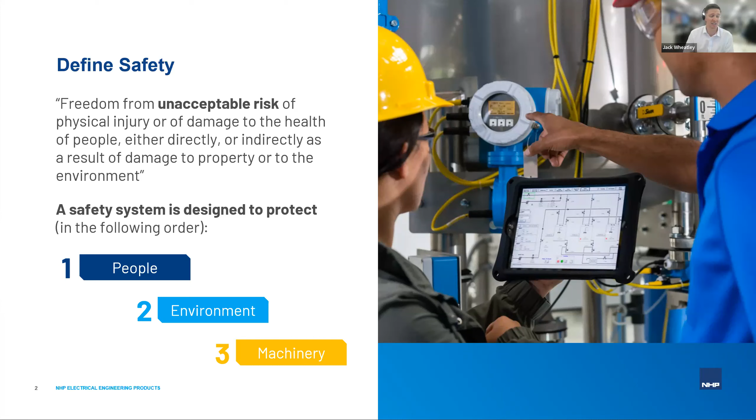Cool. So let's have a dig into the concept of functional safety a bit. So functional safety refers to having a dedicated control system, which is in place to oversee and manage the potential hazards that might be present in a machine or its processes. And the main goal of functional safety is to continuously monitor and then regulate those conditions that could pose an inherent risk in any of those machine processes. And if left unchecked, any of these conditions could lead to a dangerous situation.

Yeah. To add to that, functional safety systems encompass various aspects: basic checks like verifying your guard status, to more intricate tasks, such as controlling a robot arm, its speed and position. These different facets ensure the machine's operated safely. So by implementing a functional safety system, effectively, we're mitigating the risks to prevent a hazardous situation for people. This involves integrating monitoring and control mechanisms, so people are working with the machine together, and ensuring that we have a safe operation.

Yeah, so functional safety revolves around using specific control systems which are dedicated to protecting the machine and the people involved. So it does play a critical role in the overall safety when it comes to machinery and the processes. Yeah. So moving forward, we're going to explore how those functional safety systems are implemented, and the various components involved, just to ensure that your operation is secure and safe with that machine.

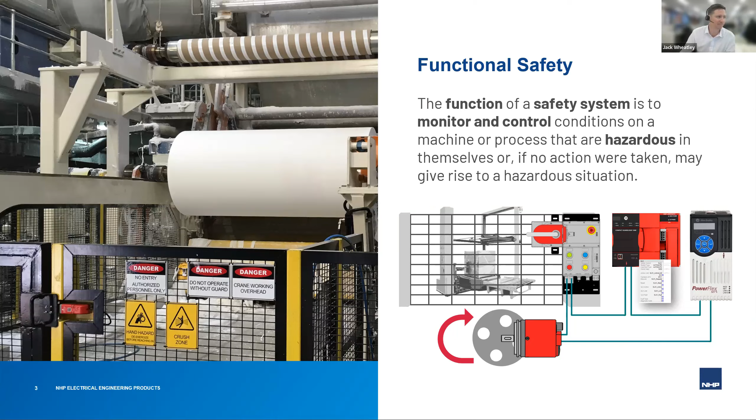That's very good. So over the years, you can see that there has been a significant evolution in safety control systems, and that's been driven by various different factors and considerations. When we look back on the history of machinery safety, you can see that there's a significant shift in focus. Yeah, I really like this picture. So back in the early days, as you can see, productivity took precedence, with safety measures being an absolute minimal consideration.

So machinery was operated without adequate safeguards, which exposed operators and nearby people to numerous hazards. Concepts like hazard analysis and risk assessments were virtually non-existent. So essentially, it was a bit of a fend for yourself approach, with little emphasis on a substantial safeguard or any safety measure for that matter. So of course, unfortunately, this led to higher risk of injuries and accidents. Fewer safeguards were implemented, as they were seen as hindering productivity.

Yeah, that's right. You can almost picture a 19th century workhouse with kids with little arms being able to stick their hands into tiny crevices of the machine. Not exactly safe practices. But of course, as time went on, there was a growing awareness among people about the significance of ensuring safety of themselves and their workers.

And this led to more societal pressures to introduce regulations that emphasize the importance of providing a safe work environment. This shift in the mindset raised the importance of safety and brought about more of the concepts of risk assessments and risk reduction strategies. And as a result, safeguarding measures were eventually introduced to prevent individuals from being exposed to hazards, even if it did mean temporarily halting the machine for adjustments or for modifications.

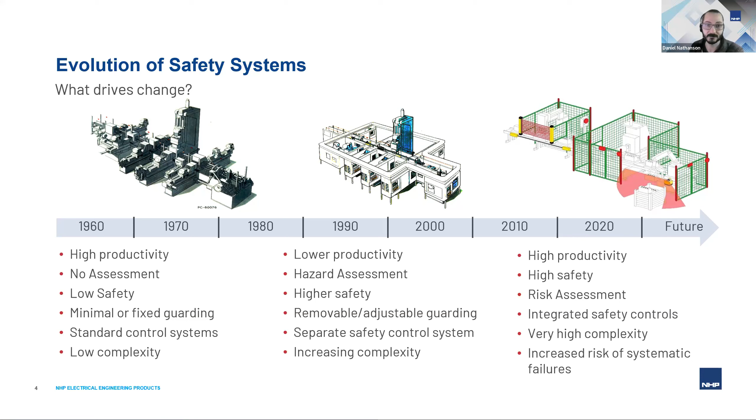But when it comes to tackling the challenge of devising a machine safety system, we can actually rely on a systematic approach that helps guide us through this entire process. Designing a safety system may seem a bit daunting, but adhering to this safety life cycle ensures that we don't overlook any critical steps along the way. It is an ongoing endeavor to uphold safety throughout the machine's lifespan.

Once we have a clear understanding of what the risks and functional requirements are, we can advance to the design and verification phase. During this phase, we formulate a safety system and conduct thorough verification processes, just to ensure that it aligns with the specified requirements of that machine. Following from the design and verification stage, we can start on the installation and the validation. This involves implementing and installing the safety system, but then also validating and testing its performance to make sure it does what it's supposed to do in the actual operating environment, not a bench test.

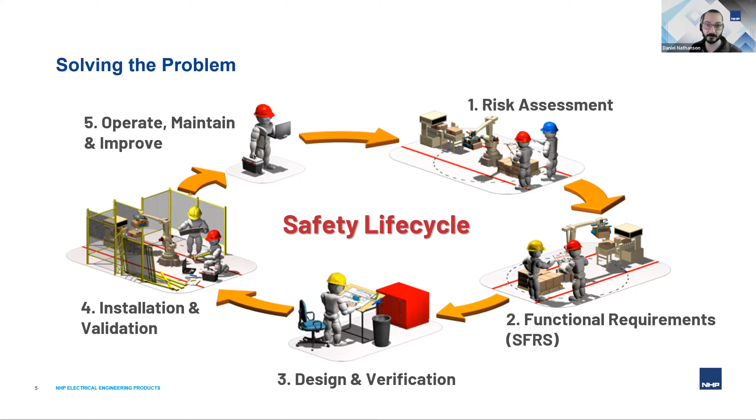Yeah, the key word there being systematic. So going through the steps, going through the motions, and making sure that everything gets checked off as you go along. Okay, so some safety standards.

Luckily we have got some standards at our disposal to help guide us in designing safety systems. However, it is worth noting that there are several standards that we use in Australia and around the world. The selection of a particular standard depends on things like your familiarity, the design complexity, and the intended deployment of the machine. While personal preference may vary, all three of these standards are still recognized and perfectly valid choices for machine safety applications in Australia.

Yeah, that's right. In fact, probably still the most commonly used standard in Australia is AS/NZS 4024.1501. This is based on the original European standard, EN 954-1. That standard focuses on qualitative safety performance. It classifies the design and the behavior of safety-related components in a control system into different categories.

However, it is important to note it doesn't consider the fault probabilities or the time intervals between these faults. Yeah, it has got some limitations, and I love that word qualitative. It's a bit of a mouthful.

But on the other hand, we've also got AS 4024 Part 1503, which is a bit of a newer one. It is based on the 2006 version of the international standard, ISO 13849 Part 1. And this standard takes more of a quantitative approach to safety performance, because it also evaluates factors like architecture, the probability of failure, and the diagnostic capabilities of the system.

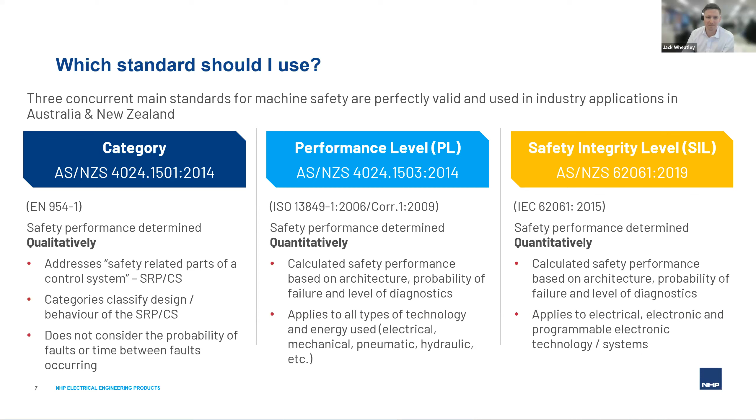Yeah, so there are some differences beyond the names. In Part 1501, we use a range of categories from Category B to Category 4, B being our least effective in risk reduction versus 4 being our most effective. Category B isn't commonly utilized, as it generally involves using standard components with not much fault tolerance. They're not specifically designed for safety applications, but they're used with the basic safety principles in mind.

On the other hand, Category 4 leverages higher levels of fault detection and fault tolerance through redundant components. So this makes it the most effective in mitigating those risks. Yeah, Category B, I like to think B is basic. There's no safety equipment. It's just some basic safety principles.

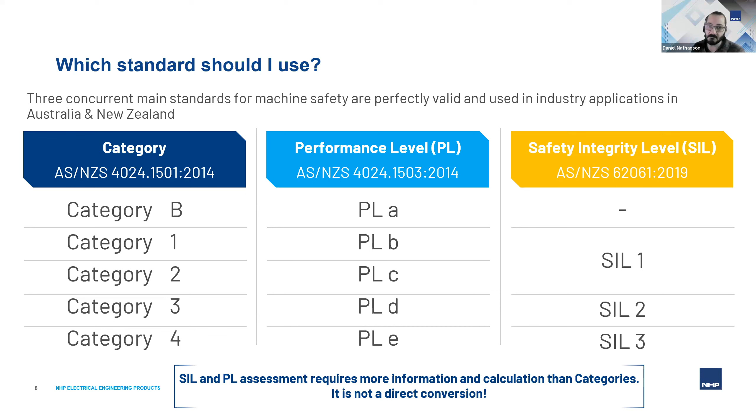And so, if you've ever had to actually look at the safety standards, which I hope some of you have at least at this point, either the international or the local standards, you will notice that there are quite a few to pick from. It's not just necessarily the 3 that we showed in the previous slides. Those 3 that we showed earlier were more around the design of the control system. But that's only one of the steps in the safety life cycle.

There are standards written to help us with performing the hazard identification. There's standards for the risk assessment. There's standards for the safeguards and for the different products that we use in them. And there's also standards which are specific to different types of machinery. And these standards are organized in a hierarchy, both at the international level and in the Australian standards. Yeah, so you can see in the slides how similar they are, but there are a few differences. So in both systems, there are 3 main levels in our triangle.

So on the international side, Type A standards cover your fundamental concepts and design principles, and that applies to all machinery. Versus Type B, the standards are more generic and can be applied to a wide range of machinery. Even within Type B, it's been split into B1, which focuses on specific safety aspects, versus B2, which addresses safeguards. So if we look lastly at our Type C standards down the bottom of the triangle, these have got detailed requirements for specific machines or a group of machines.

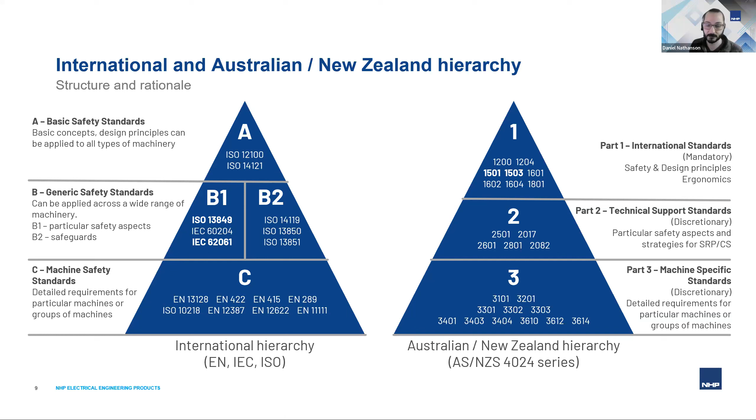Yeah, that's right. There's no point in buying the standards that you don't need, whereas the Part 1, well, you do need all of them, so you may as well get them in one hit. Yeah. So let's have a bit of a closer look at the Part 1 series now. And there are actually quite a few standards in Part 1. It's a pretty thick document, which we are going to cover in a bit of detail over the next few slides. So this slide here has got the first 5 standards, which cover things like a lot of the general principles, risk assessments, and ergonomics.

Yeah. So there are quite a few, as you can see. So these are mandatory standards in AS 4024, so they're worth looking into in a bit of detail. So I'm going to start with 1201. This draws from the ISO standard 12100, and that serves as the foundation for any machine safety system. Its focus is generally on risk assessment and then risk reduction, which provides fundamental principles and terminologies. So this standard lays the groundwork for identifying hazards, evaluating the risks, and devising the risk control strategies. Yeah, it's pretty much the most fundamental standard that you can get.

Part 1204, this one's based on the IEC version 60204-1, and this one addresses the electrical equipment of the machine. So, AS3000 deals with everything up to the isolator, and then Part 1204 deals with everything from the isolator to the actual machine itself. So this talks about a lot of the general requirements and recommendations around electrical safety of the equipment. And it also gives guidance around ensuring that you've got consistent control schemes, consistent operation and feedback, the user friendliness, and how easy the machine is to maintain and operate, really.

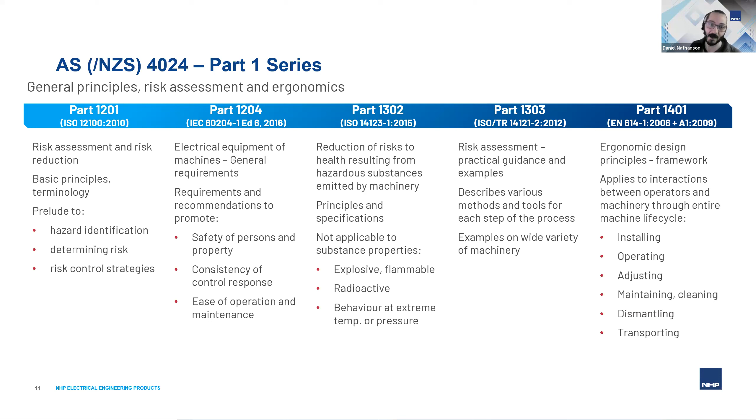There is another part that we didn't show on this slide, which is Part 1100. That one is actually the application guide to the Part 1 standards, and that standard is basically all of this presentation lumped into a standard. So it encompasses everything that we're talking about here in the application and the relevance of the Part 1 standards.

So let's take a closer look at the Part 1, Jack. Yeah, let's have a look. So let's look at AS/NZS 4024 Part 1. And this specifically focuses on designing safety-related parts of your control system. So they can be often abbreviated as an SRP/CS. Yeah, SRP/CS is a term that's used a lot. We might just call it safety control systems, probably the easier way to do it, just for brevity.

Yeah, this is actually where the real juicy stuff in the 4024 series really starts. My personal opinion, of course. In Part 1501, that's one of the ones that we saw in the earlier slides, which was the safety category standard. So it's based off the EN 954 standard, which was also the 1999 version of ISO 13849 Part 1. So yeah, look, this one is a little bit older, but we did keep it in the Part 1 series after being reconfirmed in 2014. That's 9 years ago now.

And there is a long transition period that they're accounting for, which allows us to still use categories, because machine safety is still one of those things that's becoming more and more well understood, and categories is one of those easy to digest concepts. Eventually we will make the transition from categories by themselves, but in the meantime, it's still a well-tried method for machine safety design. So it's going to stick around for a little bit longer. I'm hoping sooner rather than later. So I think we'll be waiting for a while.

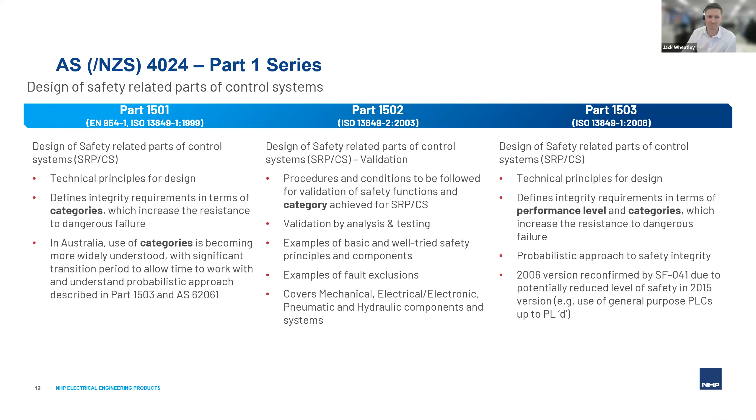Yeah. All right. So let's continue into the Part 1 series. Part 1600 are the equivalents to the Type B2 standards. So they specifically cover requirements for safety components and subsystems, specifically focused on interlocks and guarding design. Yep, this is another one of my personal favorite sections of the standard. There's a few, Dan. Yeah, you can tell I've got a bit of a passion for this.

Yeah, so these ones are all about the essential components of most machine safety applications. So we're talking about things like the guarding, the monitoring of the guarding, interlocking, and of course emergency stop, because every machine needs an e-stop on it. And starting with Part 1601, this one's based on the European EN 953, and that covers things like the design requirements for fixed and movable guarding, which is used to keep people out and hazards in.

Yeah. So I guess the whole point of guarding is to minimize the exposure to a non-mechanical hazard. However, the standard doesn't cover guards that activate interlocking devices. So this is why we also have Part 1602; it's based on the 2013 edition of ISO 14119. So this one concentrates on the interlocking devices associated with those guards. So it gives details to their design and the selection, operating principles, and also the different forms of interlocking devices

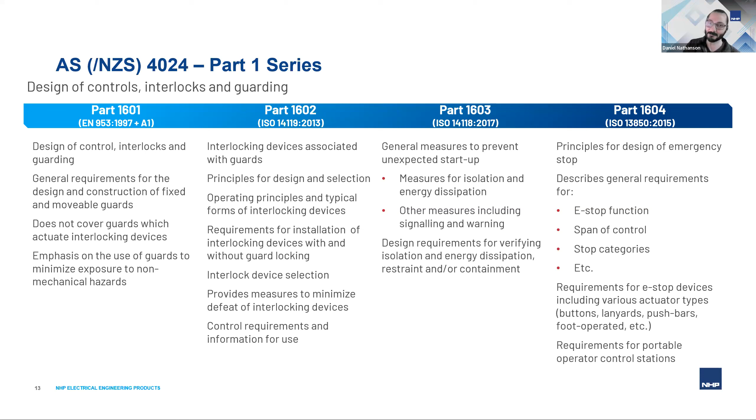Yeah, if there's one standard I want everyone to read, can you please read this one on emergency stops? Because I've seen a lot that don't follow this type of standard and are a little bit subpar. This is another one of those really good ones that give you details like what color the e-stop needs to be, because I've seen black and green e-stops before. That sort of stuff shouldn't fly, but it is covered in this standard.

All right. So last few standards in our Part 1 series. So we have those that focus on the human factor aspect of any machine operation and interaction. Yep, that's right. I did mention that machines are used by people, so they need to be made with people in mind. So Parts 1701 to 1704. These provide a standardized list of human body measurements. And these measurements are essential when you're designing a lot of the safeguarding measures. So things like specifying the gap sizes, access points, just ensuring that machine areas are safe for human interaction.

Yeah. I guess additionally, Parts 1801 and 1803 outline our safety distances and gaps. So this standard comes into play when we're trying to determine appropriate placement of our guards. So they're considering factors such as opening sizes, approach speeds, and of course, the stopping performance of a machine. So it's crucial to ensure that there is enough distance between the human and the machine to allow for that safe operation to respond in time.

Yeah, these are some of the more important ones to consider, and we use these a lot when we're positioning a lot of the non-guarding components like light curtains, laser scanners, pressure mats, and there are other standards which we'll get to in a moment which address those.

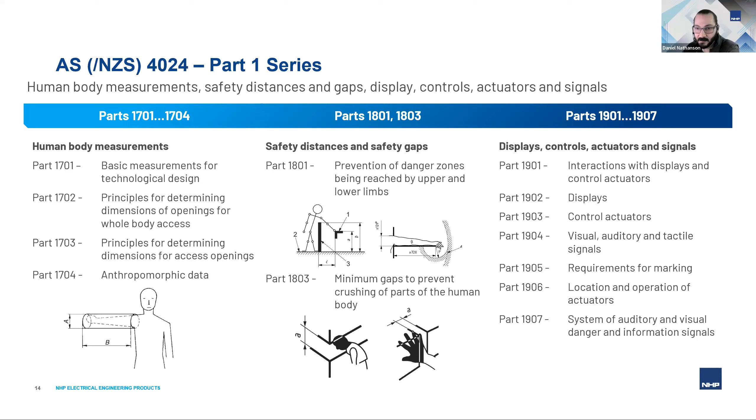And lastly, we've got Parts 1901 through 1907, and these ones focus on the requirements for displays, controls, actuators, signaling. These standards provide a bit more guidance on how users and operators can effectively interact with the machine, in terms of controlling its functions, changing settings, and just receiving feedback on its current state. Mm-hmm.

Okay, more Part 2 standards now, getting into the thick of it. Love it. Let's dive into what is the AS/NZS 4024 Part 2 series. So this focuses on specific safety aspects and strategies for safety-related parts in a control system. It's important to understand and implement these standards based on control strategies employed in the machines. Absolutely. So some of these are more applicable than others. It depends on what kind of control strategies you employ in the machine.

So, for example, Part 2501, which is based on ISO 14159, looks at things like hygiene requirements. It becomes relevant in situations where there's maybe a hygiene risk to the consumers of the product.

And so these are particularly used in machines that are used in pharmaceuticals or in food and beverage. Yeah, so let's now look at and move over to part 2601. And this covers two-hand control devices. So although they're not commonly used nowadays, due to the available advances in technology with light curtain systems, this particular guide provides guidance on the design requirements if people do choose to employ that control strategy. Yeah, we don't see too many new machines coming out with two-hand control these days, but the standard is there in case you do want to implement it.

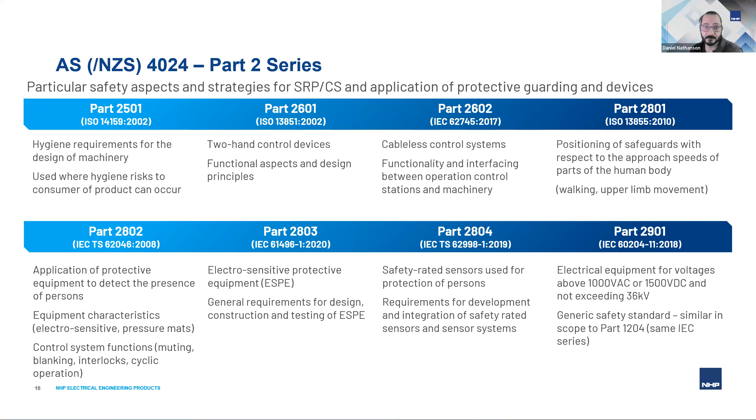Cool. Well, let's shift our attention to the part 3 series now, Dan. So this is a whole suite of standards specific to various types of machinery, right? Absolutely. And there are currently, at least at the time when we wrote this presentation, 25 standards in the part 3 series, and each one of these is tailored to address very specific hazards or risks or safeguarding requirements associated with particular types of machines. Part 3 is actually going through a lot of work at the moment. There's a lot of new standards being adopted into this series, and so we do expect to see a lot more of these in the future.

Yeah. A good thing to note also is that, while you might see these standards primarily used by our original equipment manufacturers, our OEMs, who are typically involved in the design and the construction of machines, they also serve as a valuable reference for ongoing operation, your maintenance and your safety improvements for any type of existing machine. Yeah, that's right.

So the Part 3 series covers a wide range of different machine types, as we mentioned. So things like presses, milling machines, plastic and rubber injection molding, robots, robotic devices, they are coming. Packaging machines like palletizers and wrappers, conveyor systems, forestry machinery like wood chippers, compacting machines like balers.

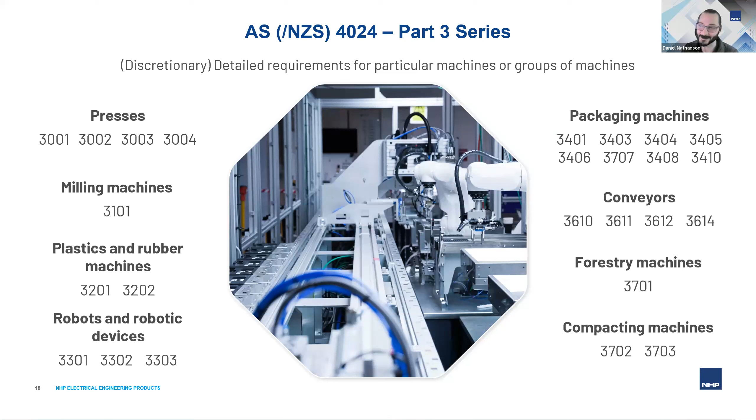All right, so let's now explore what the latest updates are for the AS/NZS 4024 series, particularly since the 2014 edition. These updates reflect the ongoing efforts of the Australian Committee we mentioned for machinery safety standards, and how they incorporate these new standards into the 4024 series. That's 4024, yeah. So currently we're looking at the 2019 version of Part 1, and there have been some significant additions in both Part 2 and Part 3 since the previous editions. Yeah, so I'll start with Part 1. You can see the highlighted standards introduced since the 2014 edition, and that included the application guide, general principles and risk assessments, design of controls, interlocks and guarding, human body measurements, and safety distances and gaps.

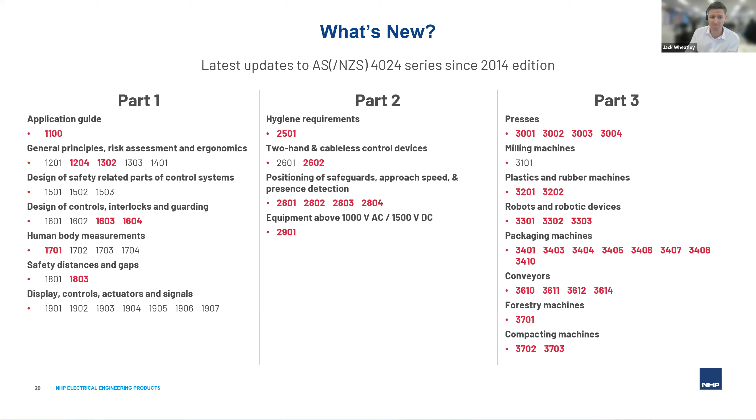Yep. Part 2's also seen the addition of a few more standards. So we've got that one on hygiene requirements. There's the one on cableless control devices. There's a whole slew of standards on the positioning of safeguards, approach speeds and presence detection. And then, of course, there's that high voltage one, which we spoke about a bit earlier. Yeah, so let's now look at Part 3, and there are some notable updates that have been made to the various machinery types: presses, plastics and rubber machines, robots and robotic devices, packaging machines, conveyors, forestry machines, and compacting machines. Yeah, a lot of those are new additions, not necessarily just updates. So Part 3 has exploded in the last few years in terms of the amount of standards available there.

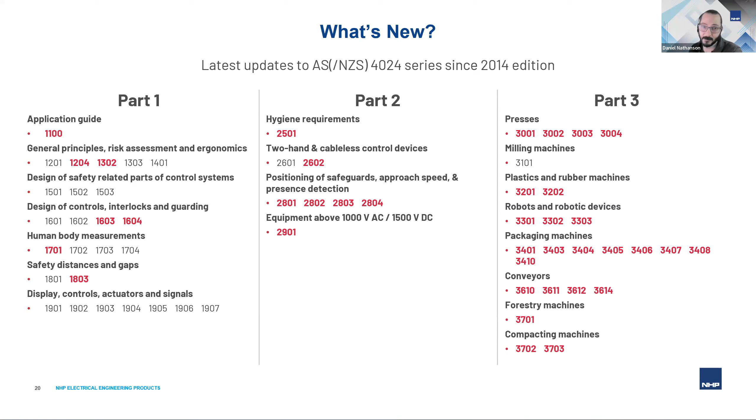So look, ultimately staying informed about the ongoing work of the Australian Standards Committee and Standards Australia in relation to the 4024 series is quite crucial. It ensures that all of our machine safety practices are in line with the latest international standards as well. And by regularly reviewing and implementing these standards, we can take a more proactive approach in maintaining a safe working environment, because that's ultimately our goal. 100%.